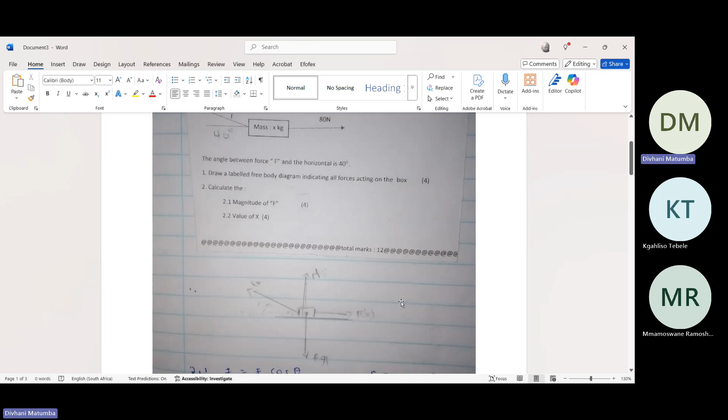Good, thanks, yes. So today I'm gonna start by doing a question that I was sent by Kgahliso. It's gonna be a bit short. I think it's very short. Kgahliso, was it today's homework? No, it was the 29th, so we didn't do corrections. You haven't done corrections yet. Yes. Okay, now let's see what we have on it.

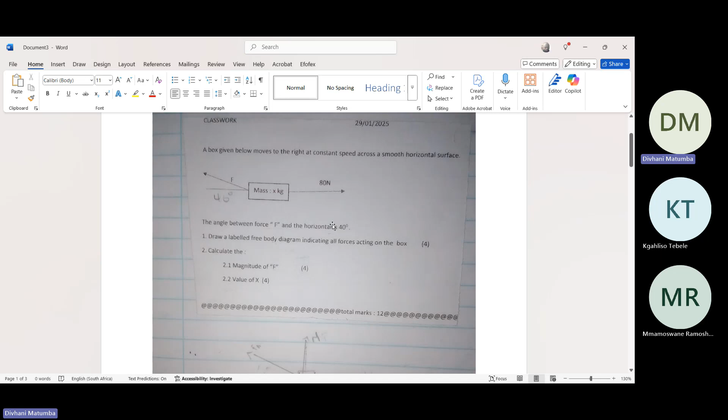Okay, the box given below moves to the right at a constant speed across a smooth horizontal surface. What are the keywords in the statement that I've just read? Which one is the keyword? Constant speed. So if you are given that your system is moving at a constant speed, what comes to your mind in terms of Newton's law? Let me guess. I think F net is equal to 0. That's perfect. Now, draw the labeled free body diagram of all the forces acting on the box.

So we'll start with a dot. So if we have a dot, does your body have a mass? Yes, it does. So what are the forces acting on your object? If it has mass, it has what? Force of gravity. Do you agree with that one? Yes. Okay. And we also have a force acting in this direction, which is 80. You can say it's an applied force, but I'm just gonna write it as force applied, 80 newtons.

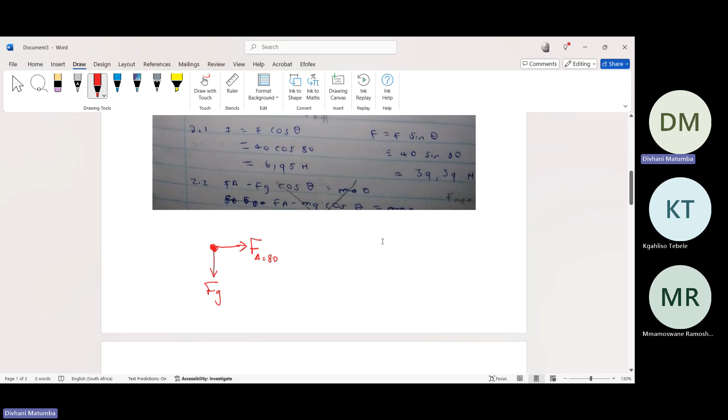And then, do we have a surface? Yes, we do. If we have a surface, what forces are going to act on your object? First one is the normal force. And the second one will be... Mamsan, if you have a surface, what are the forces that you're expecting? So normal force and... I don't know, frictional force.

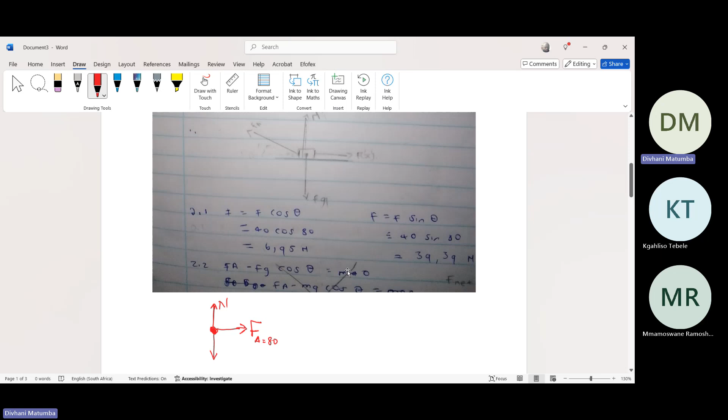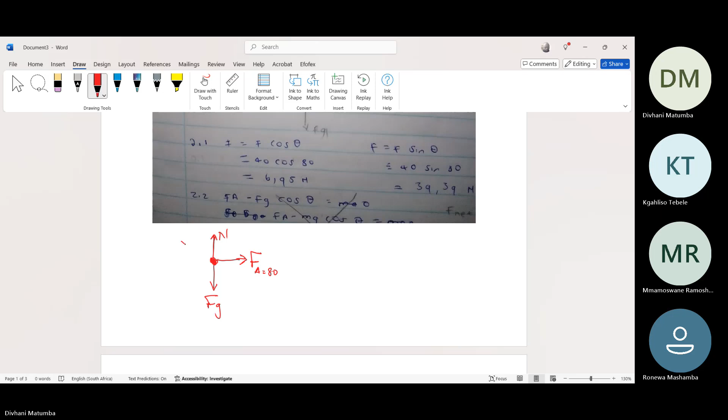Friction. That's true. However, you have a smooth horizontal surface. What does it mean, Mamsan? Does it mean that there is no friction? Friction equals 0. Okay. That means we can exclude friction in our calculations. So if we exclude friction, what other force are we going to represent? Force F, which is an applied force. F. And then the angle is 40 degrees. Let me see what you did. Yeah, you got it right.

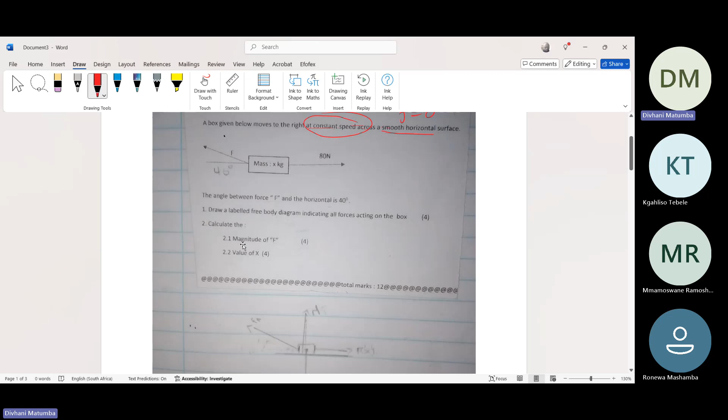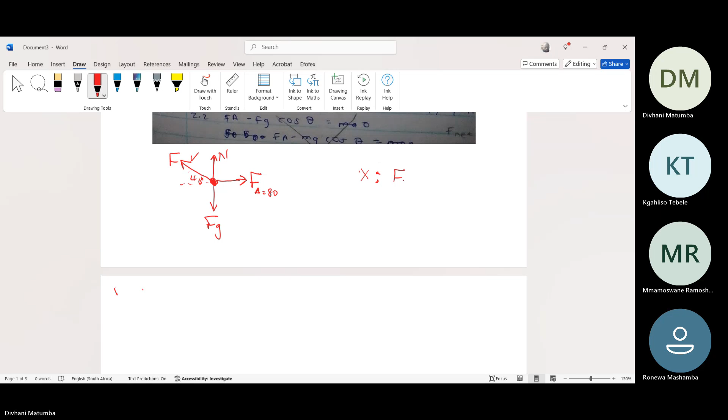Then they said calculate the magnitude of F. So, Mmamoswane, what is it that we must do in order to solve for F, which is the applied force? So don't we need to break the force F down into its components? That's true. Do we have a tilted force? This is the tilted force. So the horizontal component of it will be what? F. The horizontal component will be F... I can see here you did right, but you didn't indicate.

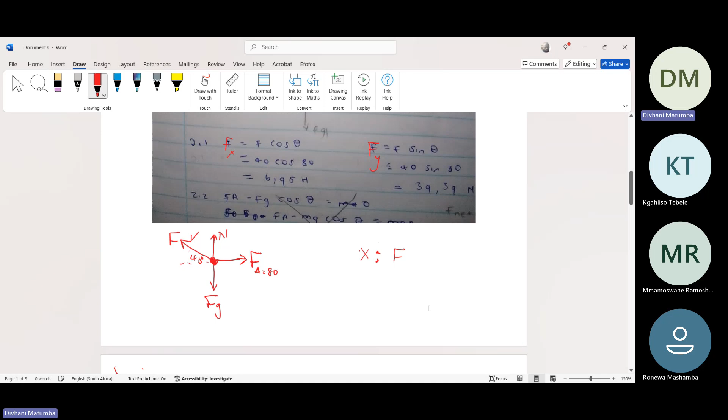So your horizontal component will be F cos theta. Why is it cos theta? Because the horizontal component forms part of the angle. So the component that forms part of the angle is a cos. And your vertical component does not form part of the angle. So your y will be F sine theta, or F sine 40 degrees. That's okay. Now, what is the next step, Mmamoswane? What will be the next step?

So will it not be F sine theta minus? We resolve in the x direction, right? Yes. And it will be, you said F sine theta. No, F cos theta. F cos theta plus force applied. Yes, force applied, this one. Mm-hmm. And then is equal to F net. F net, which is equal to 0. Okay.

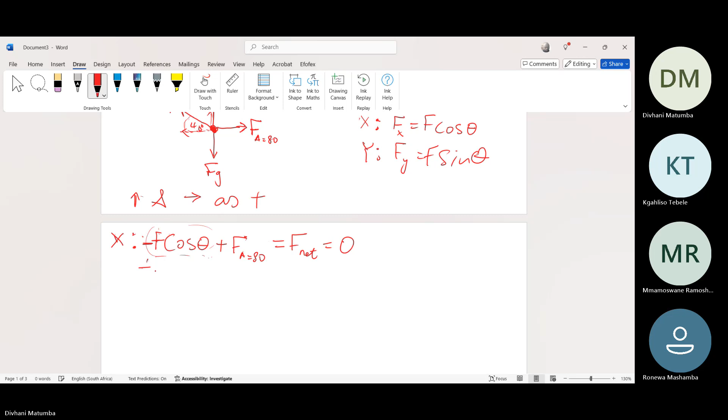Why is it that our F cos theta is positive? Mmamoswane. Please repeat your question. Why is it that F cos theta is negative? It's negative? No, you said positive. Why is it positive? Oh, no, sir. Isn't it negative because it's going in the other direction? Yes, but you didn't say so. I'm sorry. Okay. Do we all agree that our F cos theta is negative? Kgahliso. Yes, I do. Ronewa, do you agree? Okay, I assume she agrees. So the next step, Mmamoswane, what will be the next step?

I think we all agree. 80. I am going to take this portion to the other side. So if I'm taking it to the other side, if it's going to cross the equal sign, it will change the sign to positive, which is F cos of 40. So to get F, I will have to divide by cos 40 both sides. So these two will cancel.

So F will be 80 over cos of 40, which is how much? Let me check. 80 divided by cos of 40. It will be 104.43 newtons. So do you have any question concerning that? No, I don't have. Okay, let me see what you have got. Okay.

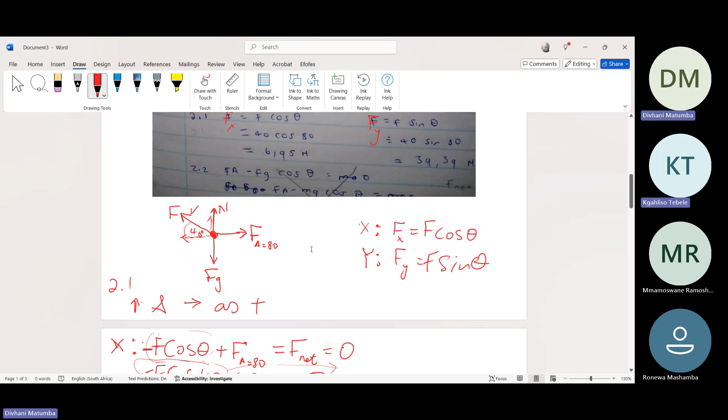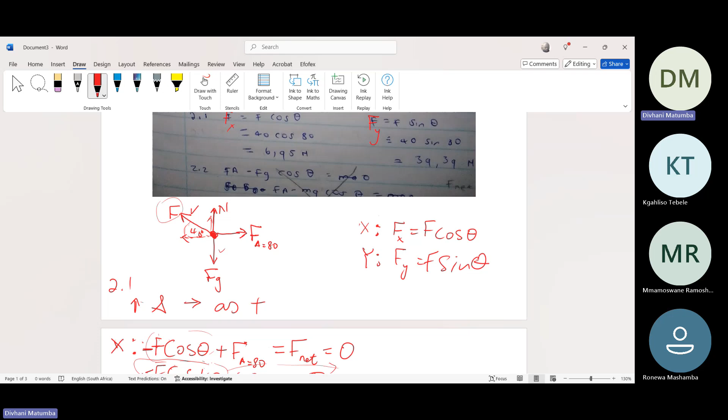Now, Fg is actually equal to minus mass times what? Mg. Then F sine of 40 plus the normal force. Actually, I'm realizing that we did not put... Oh, yeah, we actually put all the forces. Yeah, all of them are in. It's equal to F net equals 0. So we will have minus. What is the mass?

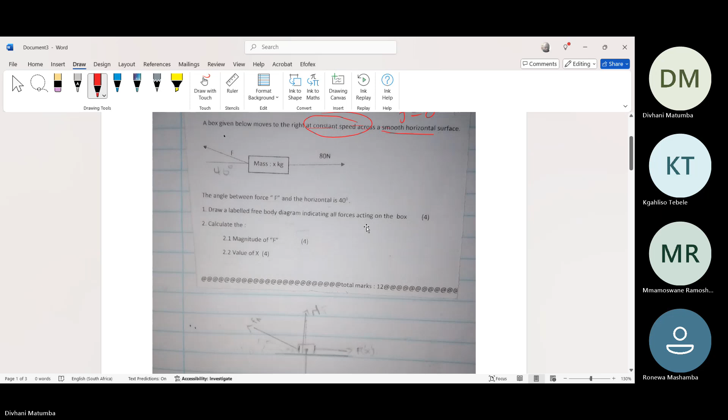The mass is X. The gravity is 9.8, plus, we already have F, it is 104.43 sine of 40, plus the normal force. This is equal to 0.

Okay, I'm gonna take everything to the right hand side. Or let me take minus X times 9.8 to the other side. It will be positive. So I'm gonna be left with 104.43 sine of 40 plus N is equal to X times 9.8.

Now X is given by, if I divide both sides by 9.8, x is equal to 104.43 times sine of 40, which gives us 67.1, plus the normal force, all over 9.8.

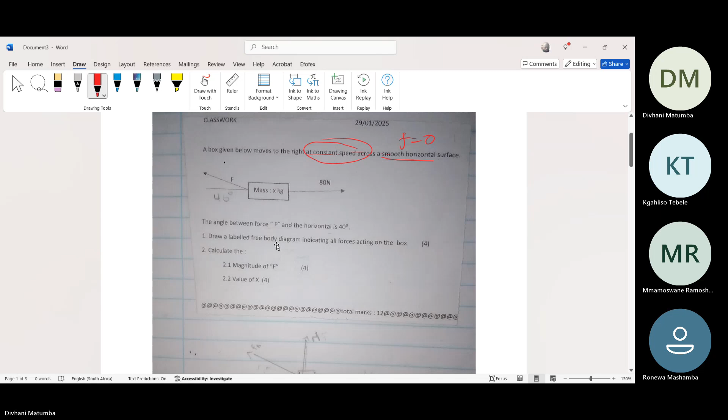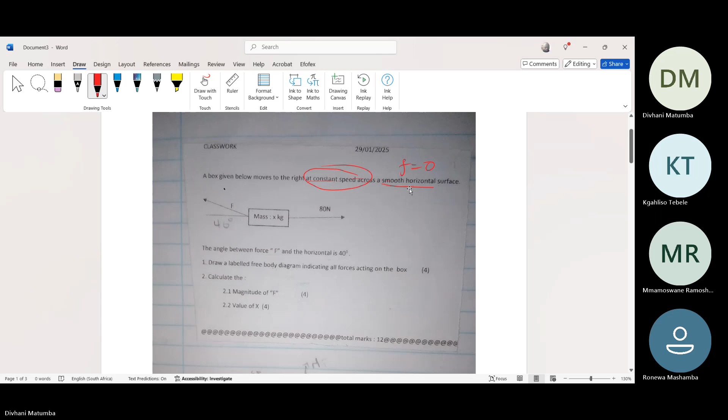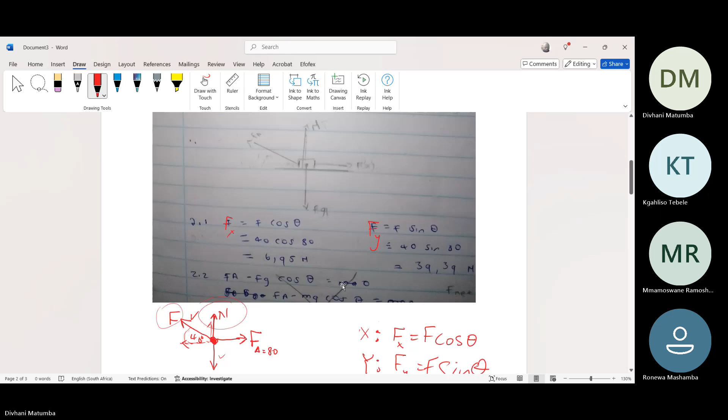So that's the value of x, because unfortunately we cannot solve for the normal force, because we were not given the normal force. So that's what we have. And the unit is kgs. Does anyone have a question? Okay, if you don't have any question, I'm gonna try to bring my own question. Let me put the whole question up.

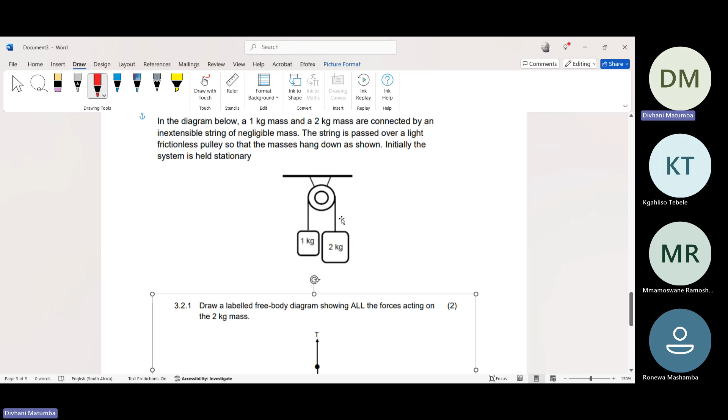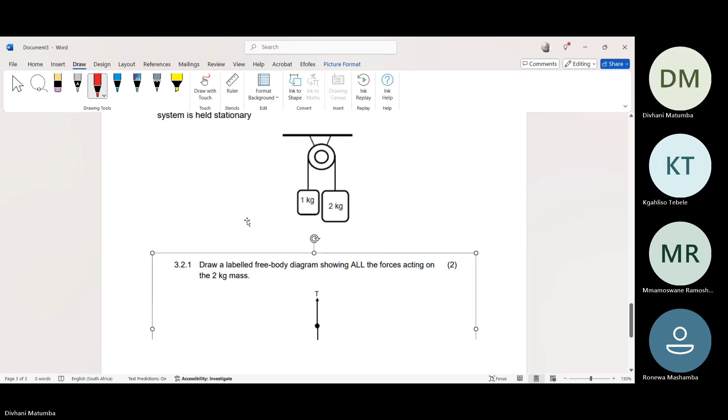Okay, we have the following question. In the diagram below, a 1 kg mass and a 2 kg mass are connected by an inextensible string of negligible mass. The string is passed over a light frictionless pulley so that the masses hang down as shown. Initially the system is held stationary. Then they said, draw a free body diagram showing all forces acting on the 2 kg mass.

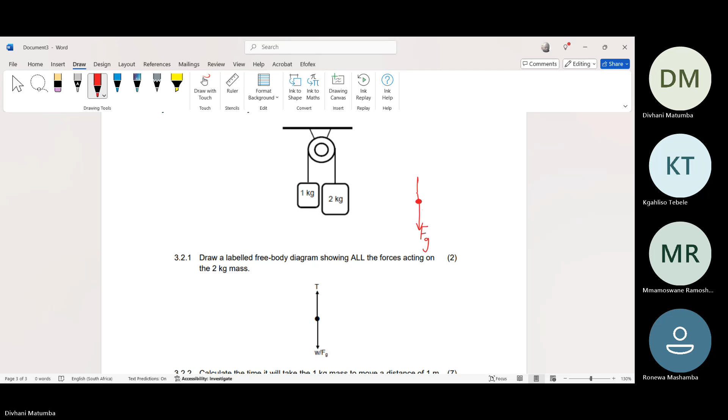Ronewa, what are the forces that are acting on the 2 kg mass? The first one. The force of gravity. Okay, force of gravity. The second one. Is the tension. Okay. Yeah, that's correct. It's the tension. Now, calculate the time it will take the 1 kg mass to move a distance of 1 meter when the system is released.

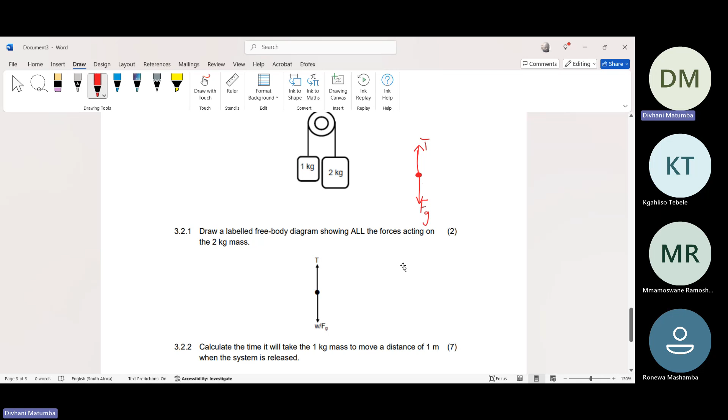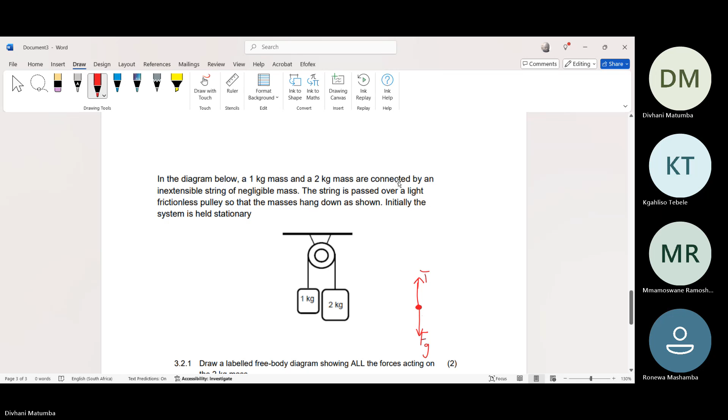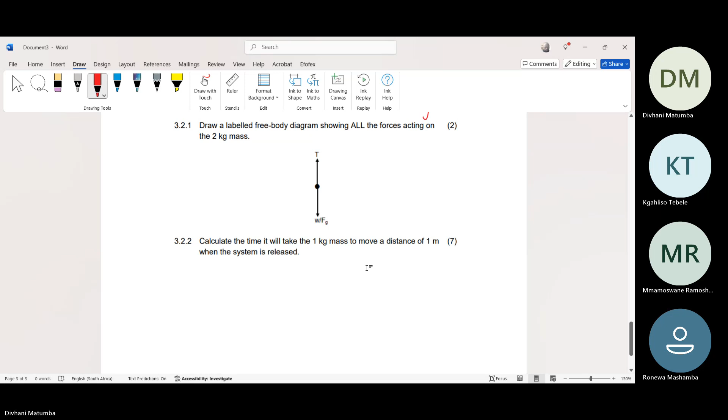Now, did you guys use the equations of motion in grade 10? Do you remember the equations of motion? Good time. Okay, now first things first, if you are dealing with forces, is to draw a free body diagram. The second thing will be to choose the direction as positive. Now, the third step is to go and resolve.

Let us go and resolve all the forces in the y direction on the 2 kg block. They said initially the system was held stationary, meaning the system is not balanced, but it was held maybe by a hand or something to stop the system from moving, because you can see clearly that the two sides are not in equilibrium. One side has 1 kg and the other one has 2 kg. So if it has 2 kg, obviously there will be acceleration. The 2 kg will pull down the 1 kg. That's what will happen.

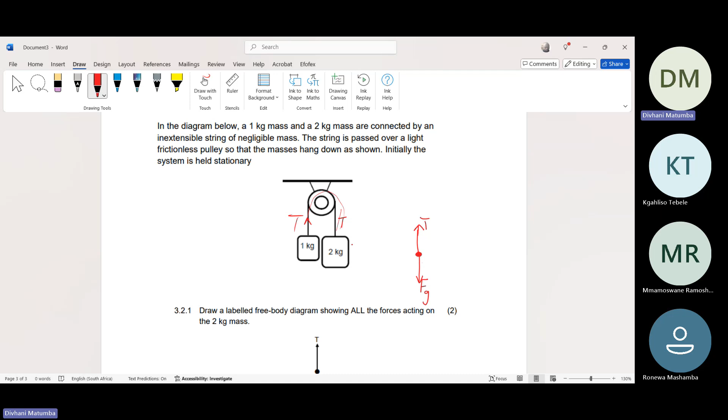In this case, we are sure that there will be acceleration from observation. And we have been told that the pulley is frictionless. What does it mean? It means that the tension on this rope will flow to the other side, and it will be the same as this one. So these two tensions will be the same. Why? Because the pulley is frictionless. I think I have emphasized this a number of times. Now,

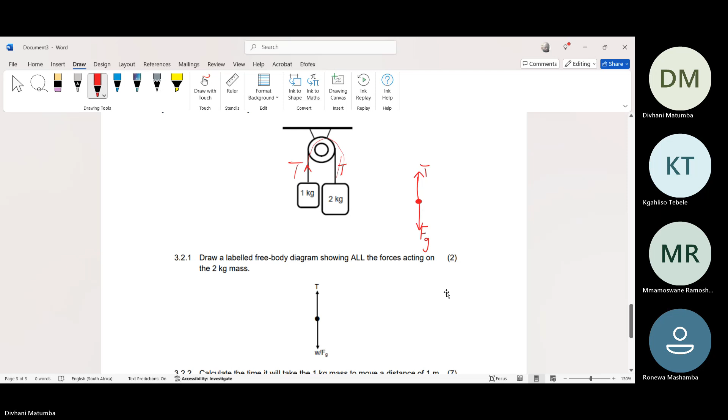Kathy, so how do we resolve forces on the 2 kg block using the free body diagram we have drawn? Kathy. Okay, we will have the tension. Tension positive, then minus force of gravity, and then after that, it is equal to F net. F net is equal to 0. Why is it 0? Because it is stationary.

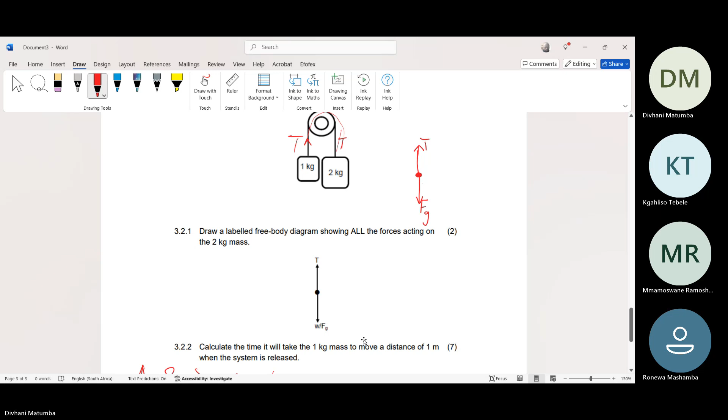Initially, it was stationary, but now we have released the system, meaning that we are allowing the system to be what it is. So it is no longer stationary. From observation, there will be acceleration, because on one side we have a 2 kg and the other side we have a 1 kg. The 2 kg will pull down the 1 kg. Do you agree? Yes, I do. Because they said the system is released. So it's not 0, it is mass times acceleration. You agree?

Yes, I do. Okay. Now they said calculate the time it takes for a 1 kg mass to move a distance of 1 meter. So what is it that we need to calculate in this case? Do we have tension? No, we don't have. Do we have force of gravity? I think we have. Do we have it? Yes. Okay, so tension minus mg is equal to ma, and tension minus mass. What is the mass? 2 times 9.8 is equal to, the mass is 2 times, do we have acceleration? We don't have.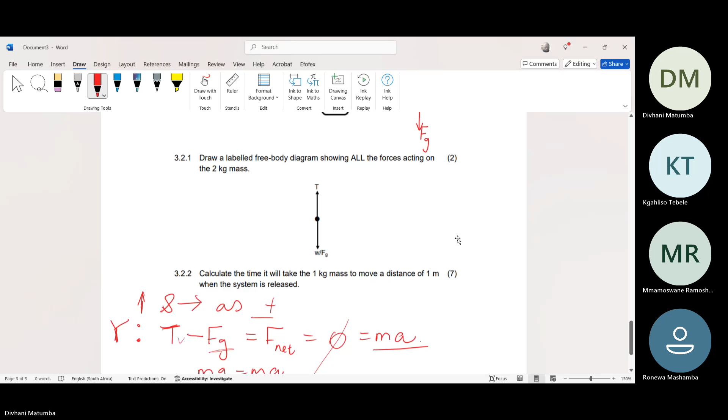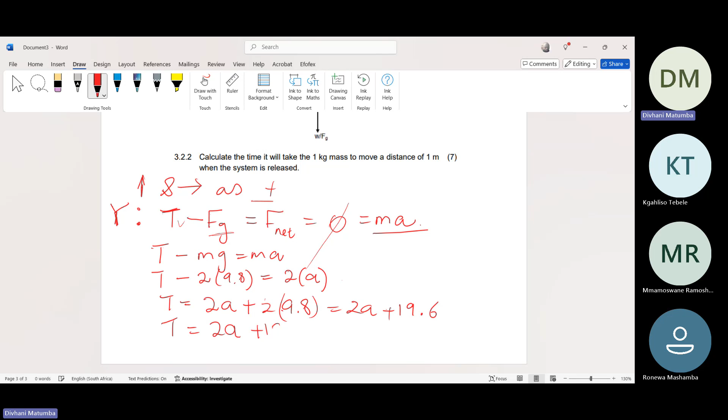So we will have this as equation number 1. Or let me say tension is equal to 2 times acceleration plus 2 times 9.8, which is equal to 2a plus, 2 times 9.8 is what? 19.6. Okay, so tension is given by 2a plus 19.6. Okay, that is the tension on a 2 kg block.

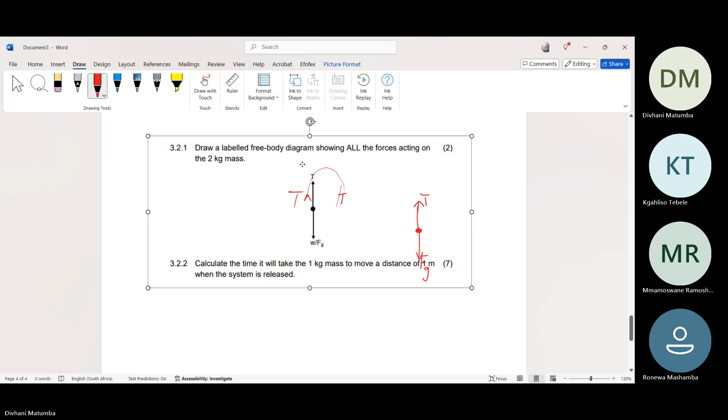So if we have the tension on the 2 kg block, we have been told that we are dealing with a frictionless pulley, meaning that your tension will flow. So if your tension will flow, we're gonna have to go to the 1 kg block as well. I'm trying to shift. Okay, now I'm gonna do a free body diagram for the 1 kg.

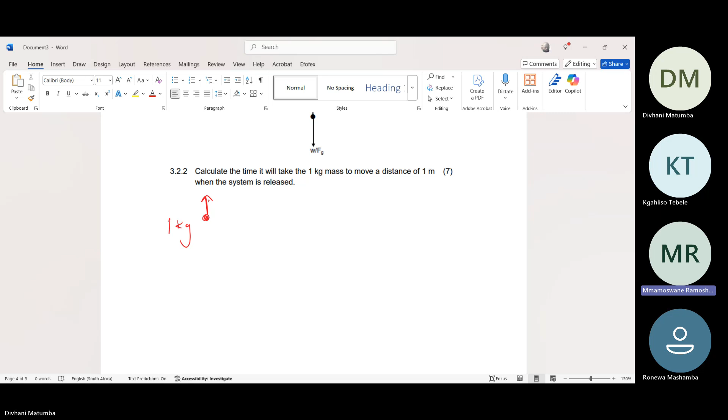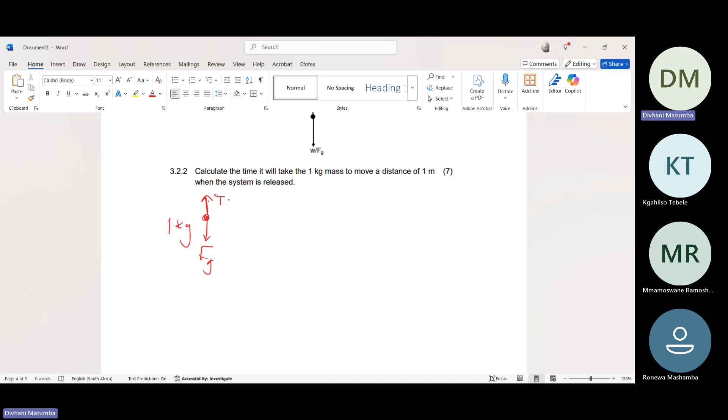Mmamoswane, what forces do we have on the 1 kg? So do we not have gravitational force? Fg and what? Tension force? Tension force. And do you agree that the very same tension that I was calculating is going to be the same as this one? You agree?

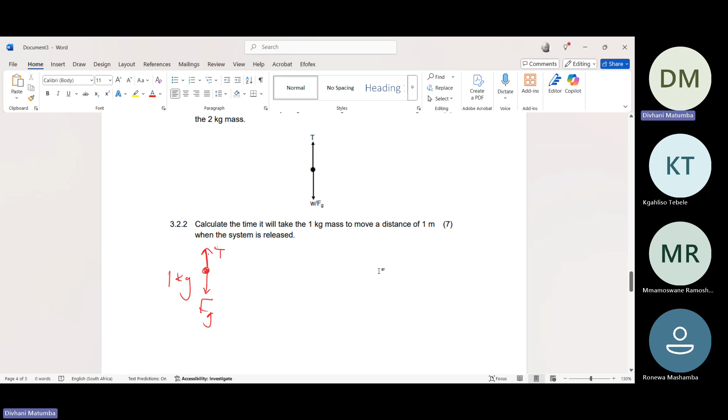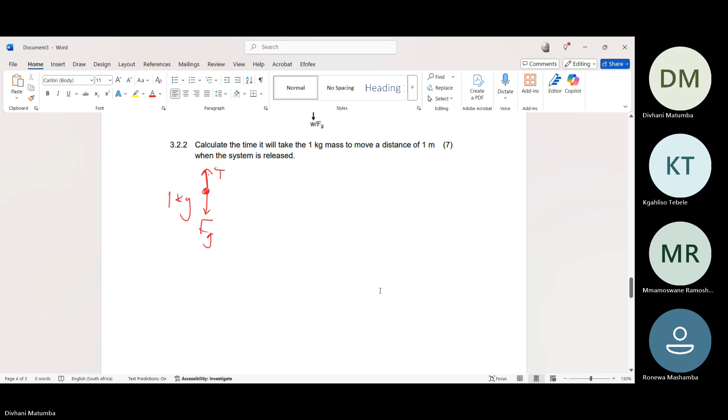Yes. So whenever you see problems that involve tension, what they are trying to do is they want you guys to calculate simultaneous equations, because you're going to be dealing with a problem whereby tension on the other side of the pulley will be the same. So we're going to do almost the same thing we did on the 2 kg. So what will be the first thing? Ronewa, we are resolving in the y. So what is it that we have?

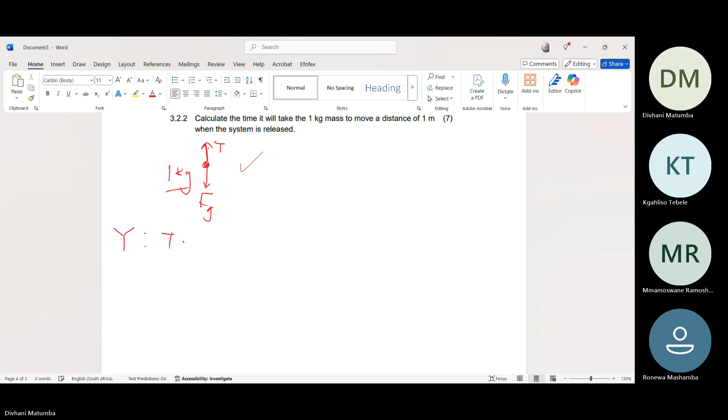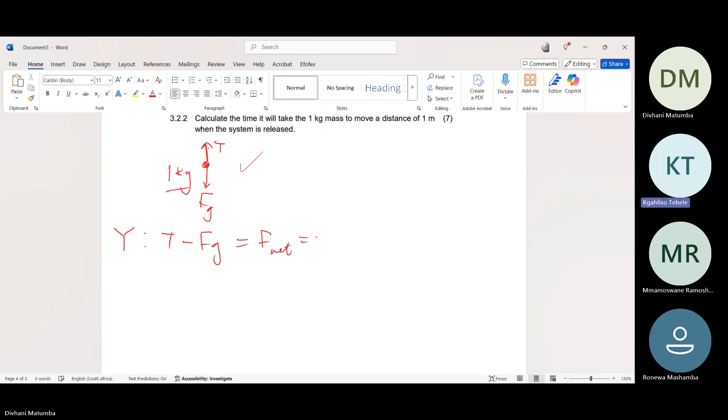Ronewa, Kagiso, how do we resolve forces in the y direction on the 1 kg, given that we have a free body diagram? So I have tension minus force of gravity is equal to F net, equal to ma. Why is it ma? Because you said the stationary system is released. Yes, there will be acceleration. Okay, so we're gonna apply the same thing.

We do not have tension. Do we have the force of gravity? What is it, Kgahliso? They have one. I mean mg. Okay, it's equal to ma. Tension minus 1 times what? 9.8. It's equal to 1 times acceleration. Then if we take this to the other side, it will be plus 1 times 9.8. So tension is a plus 9.8. Let's say this is equation 2. So, Mmamoswane, what do we do from here? Given that we have two equations of tension, what do we do from here?

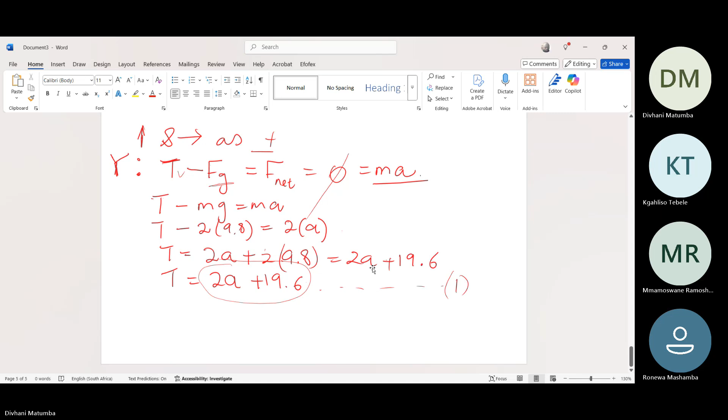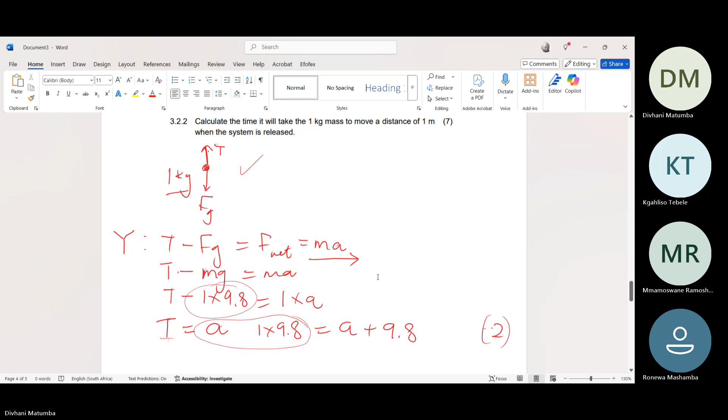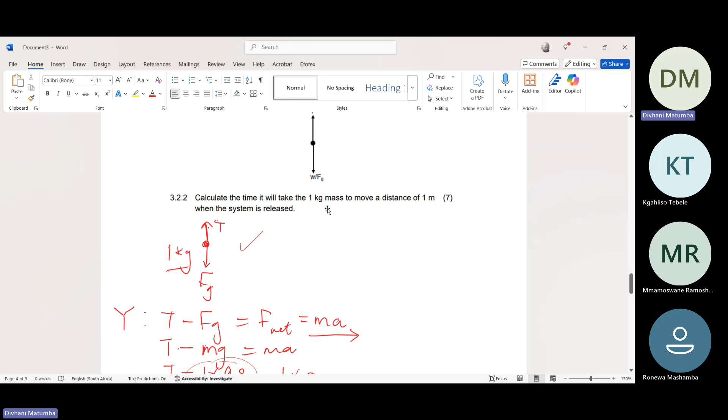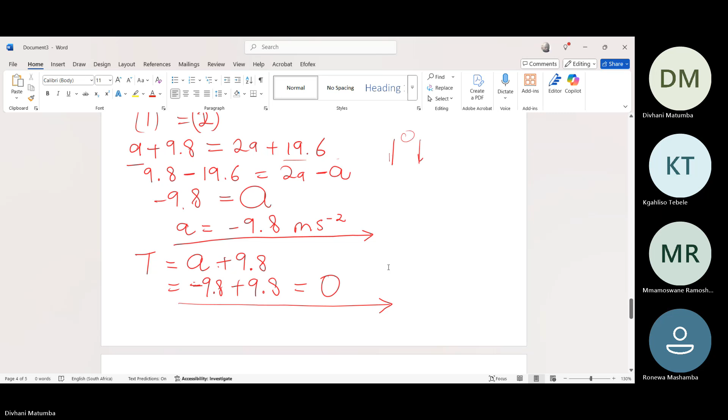Okay, let's just assume that the tension is correct, is 0. Given that we have an acceleration of minus 9.8, that means it will be 9.8 downwards on the 2 kg and it will be 9.8 upwards on the 1 kg. It will be upwards because the 2 kg will pull down the rope, and the 1 kg will be pulled up.

So if we use the equations of motion, we have acceleration and we are looking for time. And we also have the initial velocity, which is 0. We also have the change in y. So if you go to the equations of motion, the equation of motion that relates acceleration and time, let me look for it. Or do you have it in mind? Mmamoswane.

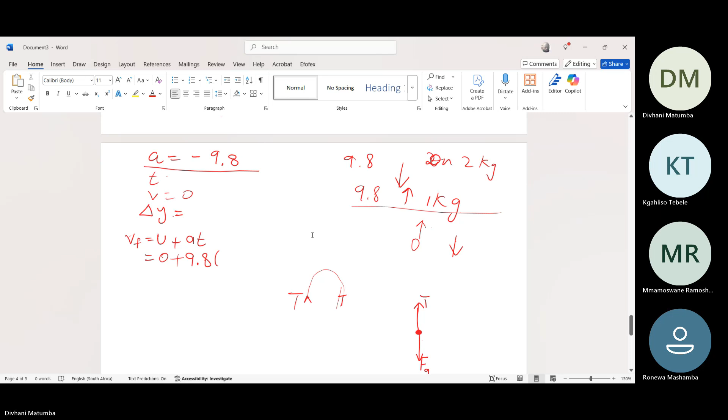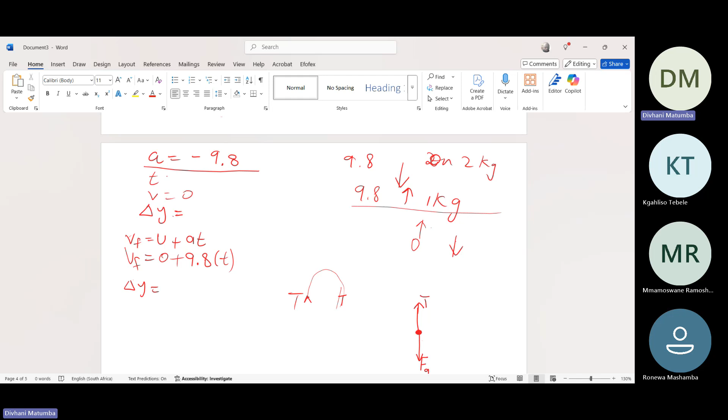So we will have V initial, it will be 0, plus acceleration is 9.8 upwards times, what is the time? Do we have the time? We do not have the time. So this one fails. Do you know of this one? I think it's UT. Do we have the time? Let me see which ones we have.

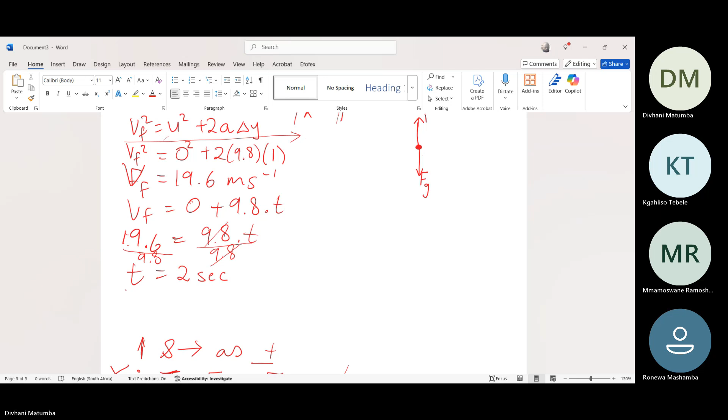So if we have V final, we can go back to your equation. V final will be 0 plus 9.8 times time. So 19.6 equals 9.8 times time. So time will be, we divide both sides by 9.8, 19.6 divided by 9.8, which is, I think, 2. Yeah, I got 2 seconds. So it will take 2 seconds for the 1 kg mass to move a distance of 1 meter.